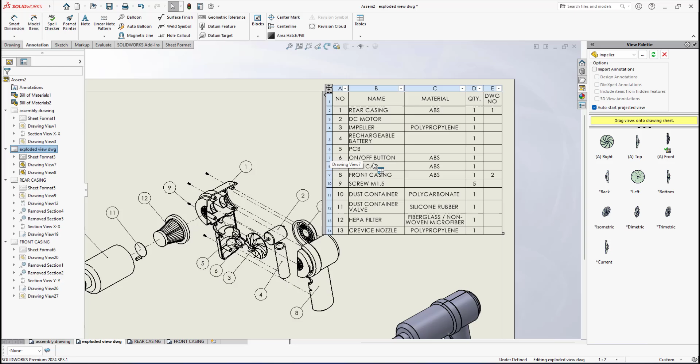This video I believe will be part 15 of my SolidWorks mini vacuum cleaner project. In this video I will do another detail drawing of the other parts, which is the impeller. So I will try to put the impeller and the on off button and rear cap. If possible, I will put it under one drawing. Sometimes you can do one drawing sheet of your detail drawing. You can share multiple components.

Right, so here there is the front casing, so I will make a copy of it and then I will paste it, and simply I will go after selected sheets and I click OK. Simply click yes. Then now I have here at the bottom the duplicated version. So this one I will rename it as Impeller. I cannot name it too long because we have kind of limited number of characters here.

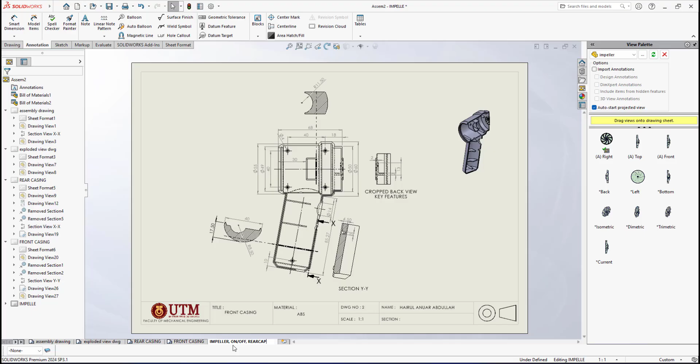On off button and rear cap, right? Rear cap. So these three parts would be in this new drawing. Okay, hold on. So this drawing, then I will delete this view and this one as well.

Alright, here the title block I edit it, and this one will be this one. The name is Impeller, on off button and rear cap. Material I will not put it, since later I will show you how I will delete this. Drawing number, this is supposed to be drawing number 3, and the scale later I will decide whether the scale 1:1 is good. Then now I'm back in drawing mode.

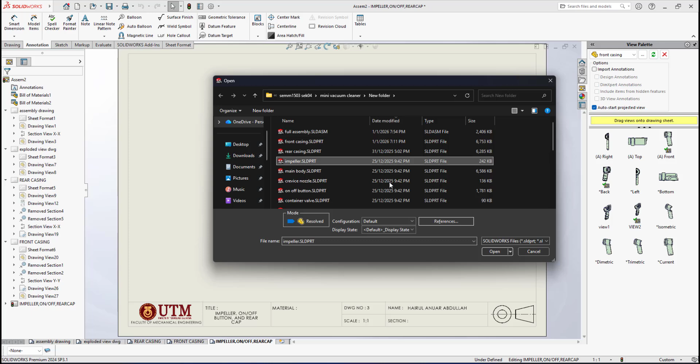Now I will open the impeller part file. If you look in this view palette, this is not the impeller, this is a front casing. To open the impeller here, I can click browse for the impeller part file. So this is my folder where I've done all the part modeling. So I will go for impeller, I click open. Now it's already listed impeller. As you can see in the menu here, we have all the views that we can drag into this drawing of the impeller part modeling.

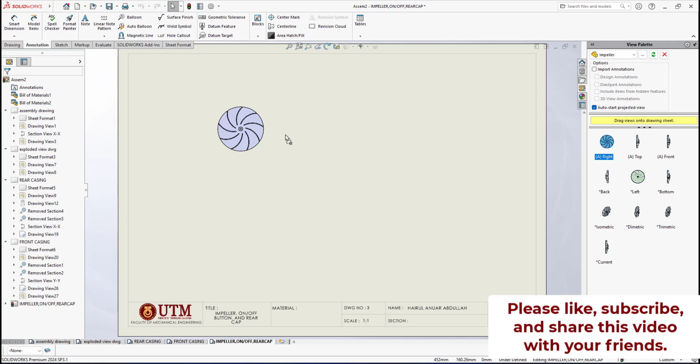The way I've done the part modeling for the impeller, the right view, on the right plane, is actually kind of like a front plane in the drawing. I just click at this right view here, and I click here at this location. If I drag it here, I can go for the left view, the plan view, and the isometric view. I only need the isometric view, and I don't want the left and plan view. I click OK. For the isometric view, I make sure tangent edge removed, and go for shaded mode. I just put it somewhere at this location.

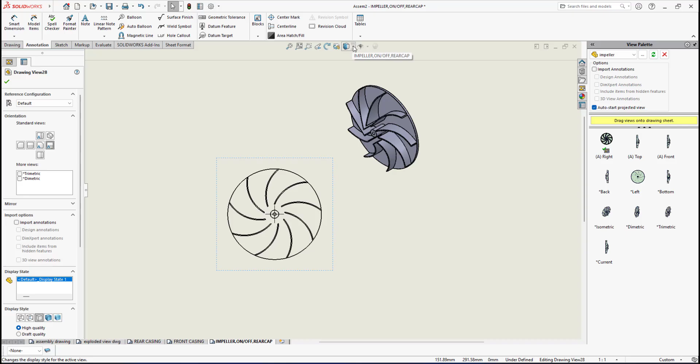Here for the impeller front view, tangent edge removed. Since this is not a section view, I need to show the hidden line. Actually, we don't have any hidden line because of the geometrical shape of this impeller, even at the back there is no hidden line. For the impeller, I need to make on the left a section view, so better to make it a section view rather than typical orthographic.

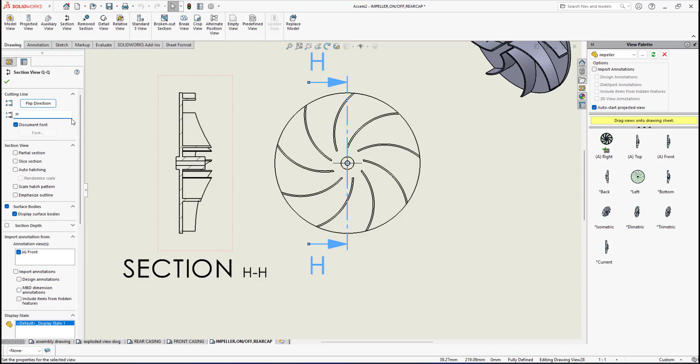Under the drawing here I have section view, then I can go for vertical. So I will select at this point, I click OK. I can bring my left section view here. About the direction of this cutting line, I can go to flip, so we are more on third angle projection. Let me click OK first. About the labeling here, I will go by the first letter. I can go for H, make sure capital letter. And now we have section H here.

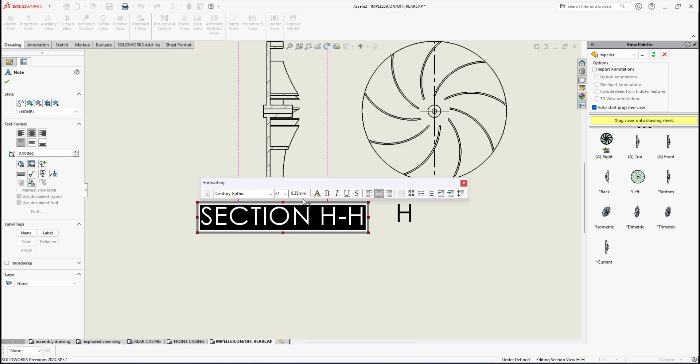About the text here, let me type first, section H, and if I double click at it, I need to make it 4 millimeter, not too big. 4 millimeter is about the standard size for the font for this title for section H. Another thing about the hatching line, I can make it, okay, density is 345.

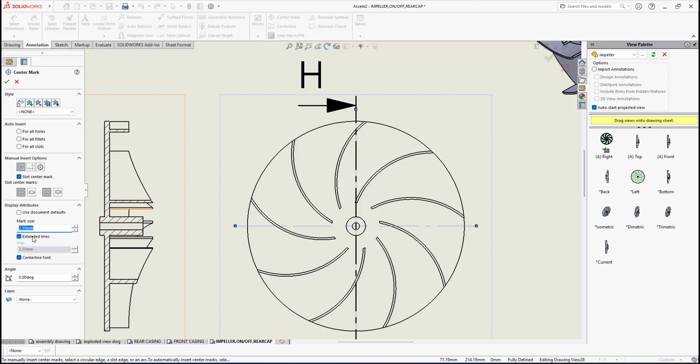Okay, let me save my file. Okay, now about another thing: any circular shape, you have to put a center mark. This center mark by default is not good, so I just delete it. Here under the annotation I have center mark, select the circle. By default it is using use document default. I uncheck it. I want to use not 2.5, I use 1. Then I click OK. It's kind of like the line type scale, it's more appropriate.

Okay, now I can do the dimensioning. The reason for me to do a section view is to facilitate the drawing; we want to avoid any hidden line, so better to make it a section view. Now for the dimension, diameter, better you go where you can see the true shape of the circle, better to be at the front view here. So I will go for this one.

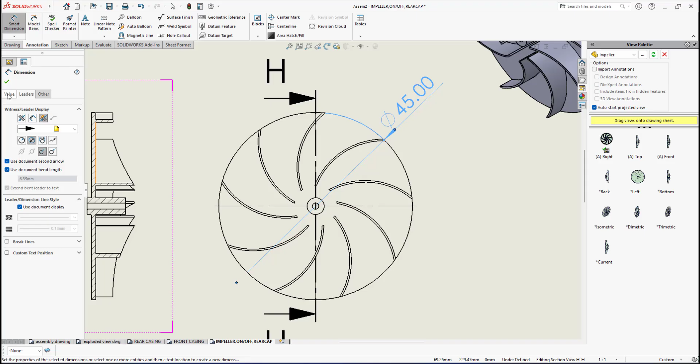Radius 22.5. Sometimes you don't want to go for radius, better to represent it as a diameter. Under the leader here you can go to the options and it goes for diameter. If you bring your text like that, the arrowhead is pointing like this, so I just simply bring it like this. And another thing is under the value here, no decimal point, so this will be the diameter.

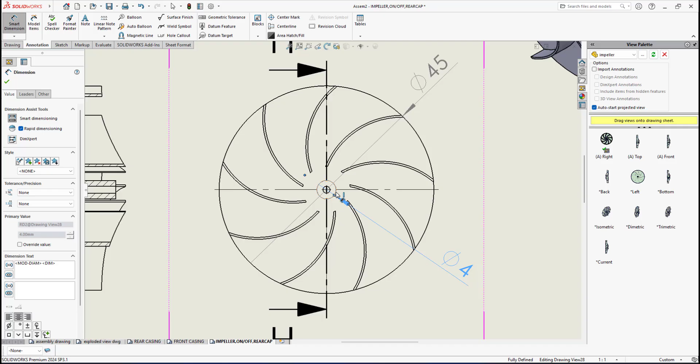Another important diameter: we have a pin here. So this is a pin. We have the center hub there. Diameter is 4, and also we have the inner hole there. Actually, this will be mounted onto the shaft of the DC motor. So I will select this circle, and I can put it at this location. So this diameter is 1.5.

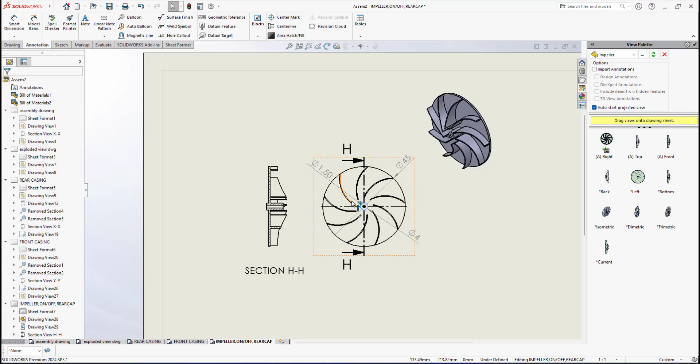Another important thing, as I mentioned before, for a plastic component like this, we don't have to do really detailed dimensions. For example, what will be the curve of this cutout when you're looking at this section view. We have a cutout here to make the blade. That is not necessary for this case, because the only dimensions we put for this plastic component are those for assembly and fitting and certain important dimensions. So I will go for the important dimensions only.

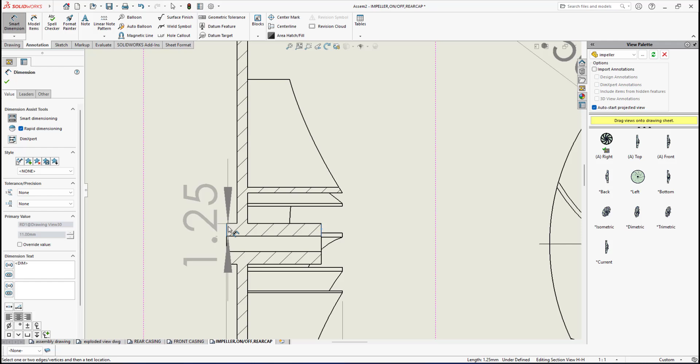I go for the total thickness of this blade. I can go from here to the end here, and it goes for 11. I put it here, so this will be the total thickness, 11. Another thing is this length from this point to this point is not significant. Then the tube: at the center we have the hub there, and I can give a dimension from here to here. I can give 9. I put it here, so this is 9.

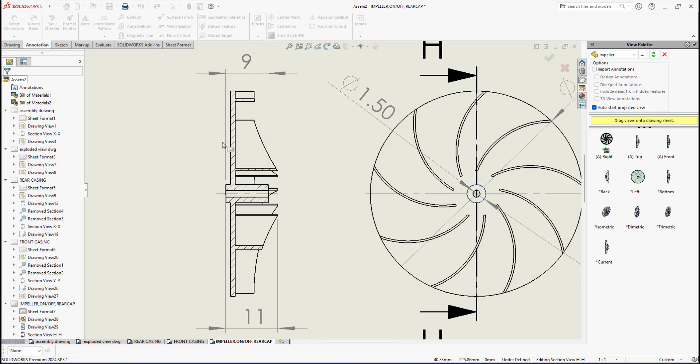Another thing, the diameter of the hole is already given. Before I forget, center line, we must have a center line for this one. And how about the thickness? I have to give the thickness from this line to this line. The thickness is 1.25. If I go for this upper side and this icon, everything will be shifted, so I need to drag it down.

You have to obey the standard of dimensioning, not too far away. The extension line cannot cross the dimension line, so the shortest distance will be at the first level, not too near, not too far, about 2 letter heights for the first level, and for the second level, not too far away or too near, at least about 1 letter height, like this. Let me drag this thing to this position.

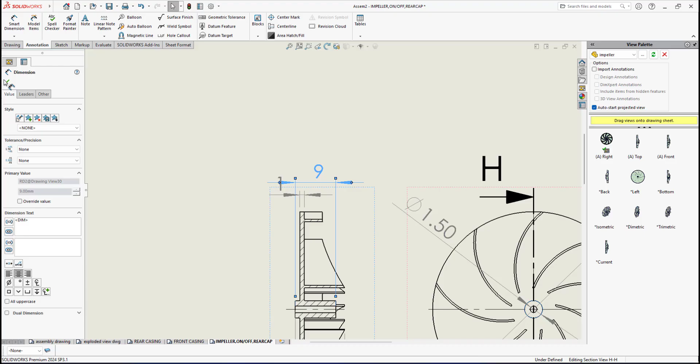Okay, save again. I have the dimension for this one, I already gave the length of the tube there, and the thickness is already given. I believe I already gave the main diameter. One thing before I forget, this is important. When people read the drawing, they need to know the number of blades. I don't have to give the radius of this one, it's not significant, because, as I mentioned before, the way they manufacture this impeller, this is not a metal part.

They are not doing this by milling, drilling, or lasing, or something else. This plastic component, they send it to CAM, which will translate to the CNC machine. The CNC machine will make the metal mold, and the metal mold will be put into the injection molding, and in that injection molding they will produce this impeller.

So if this is the way they manufacture this part, we don't have to give detailed dimensions, unless your part is a metal part where we need machining like drilling, lasing, and so on. Alright, so only the necessary dimensions, mainly for assembly and fitting.

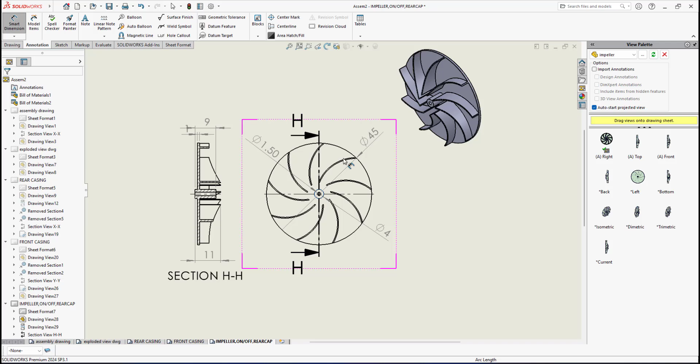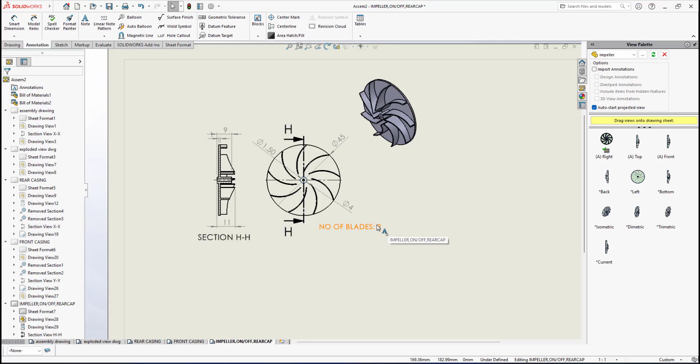Alright, okay, so now I will put another important note here. Since the number of blades is 9, we have notes, so I will put it somewhere at this location in capital letters. You put number of blades 9. Right, so I think that's all. This is enough information for what we call the detail drawing of this impeller.

Okay, one more thing before I forget. This is important. We have a local note here, right? Because we have to put multiple parts here, later I will put the on off button and also the rear cap. We have to put the local note as well. Here I will put the local note.

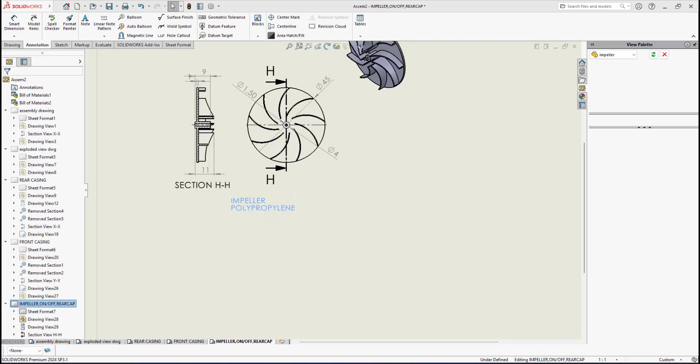So the first is the part name, so this is impeller. Then I go to the next line. The second one will be the material. As mentioned, the material of the impeller is polypropylene. Okay, the material is polypropylene. We have name, material, and the next line will be the quantity. Okay, the quantity is 1.

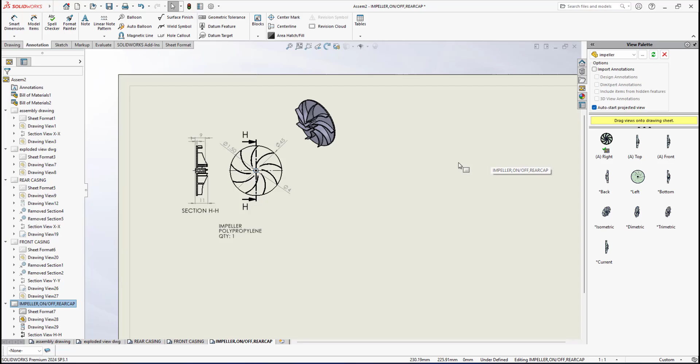The next line would be the scale, but I don't think I will put the scale, since I drag this view of this impeller in 1:1 scale. As you can see here, it's 1:1 scale, so I don't need to put the scale. Unlike the on off button, which I will put into the same drawing here. The on off button is really a tiny component compared with this A3 size. If I do the on off button at 1:1 scale, it will be so small compared with this A3.

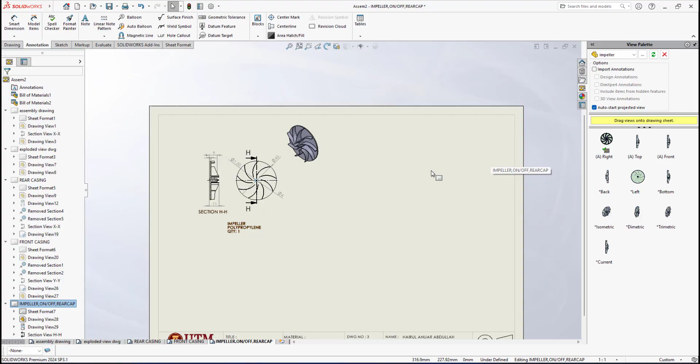It means that for that on off button, for the footnote about the scale, I will go maybe 2:1, 3:1, or 4:1, so it becomes bigger. So for this on off button, I will add the scale at the footnote. For this one, no need. It refers to the main scale of this title block, 1:1.

Right. Okay, another important thing, you have to put the part number. To put the part number, under annotation we have balloons. So I click like this. We have the circle. If I click this balloon here, in the settings on the left we have balloon text. I will not go for item number, I will go for text. Simply I type the number.

So what is the part number of this impeller? We refer to your BOM, it is part number 3. So for this one, in text I put 3, so we have a part number. Alright, okay, I think this is good enough for the impeller. We have the part number, the name, the material, and also the quantity. Alright, okay, I save my file.

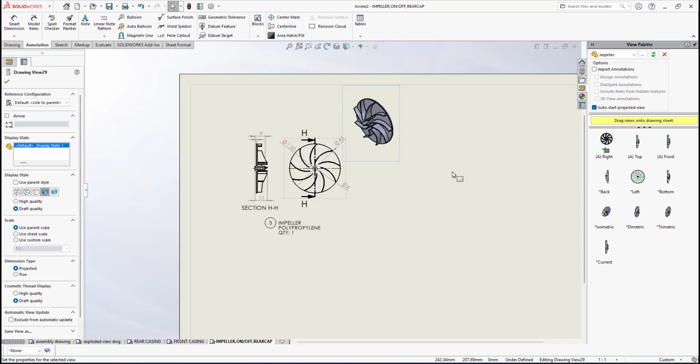Okay, later I can drag all these views to reposition them, to make sure that all the three parts that I want in this drawing are uniformly distributed in this drawing. Alright, the second one will be the on off button, and I will browse for the on off button. So I will select the on off button, then I click open.

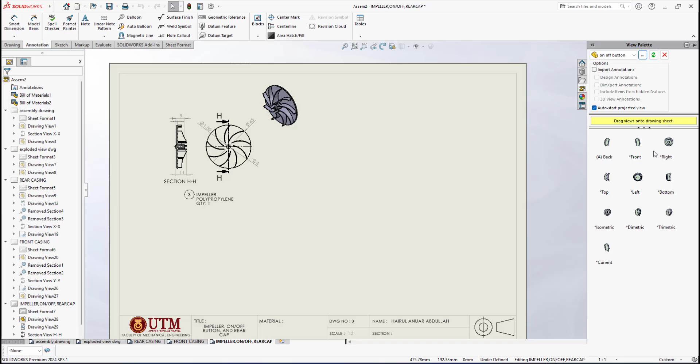Okay, now if you see under the view palette, we have all the views for the on off button, but one thing I need to mention, here if I drag the front view of my on off button, I put it here.

As you can see, the orientation of how I've done the part modeling of the on off button is not in the vertical orientation, it's at an angle, because from the beginning I did the part modeling of this on off button in assembly mode, and the axis of this on off button is perpendicular to the axis of the handle of my main body, the main casing.

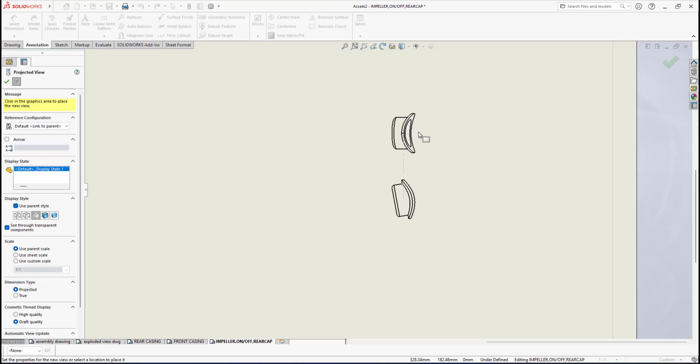So if I put it this way, the orientation is hard for me, it's not a standard view for this detailed drawing. So in order to solve this problem, let me show you. I don't want the on off button at this orientation, I need it to be in vertical orientation. So let me cancel this. I need to delete this first.

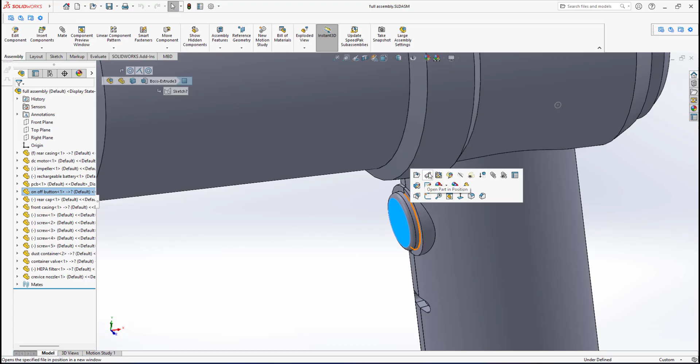Okay, what I need to do is open the assembly file, the full assembly that I have done. So this will be the full assembly. In this full assembly I will click on this on off button and open the part in position. Like I mentioned, if I go to the front view, the on off button's orientation is at this angle. This is the original on off button part modeling file.

I need to rotate it to the vertical orientation, but I don't want to disturb the original file, since whatever changes I make will affect the assembly I've done, and also the assembly drawing and so on. So I will make a clone version of this file. I will go to File, Save As, not Save as Copy and Continue. I will make a clone version, on off button 2.

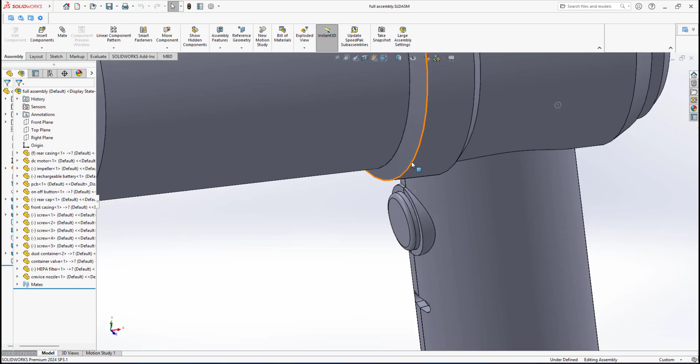So I have made a separate file named on off button 2. Whatever changes I make to on off button 2 will not affect the assembly and so on. I close this one and open on off button 2. This is the clone version. If I show you the front view again, I want to make this on off button straight vertical. I need to rotate it, right?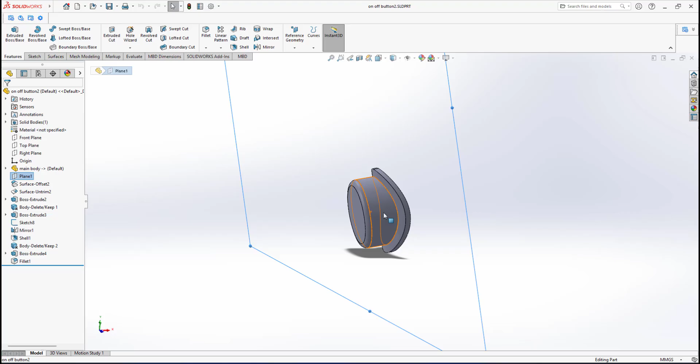But I need to know what the angle actually is. As you can see, there is a plane I've made for this. This is plane one at this orientation, so I need to know the angle between plane one and the right plane, the standard right plane. Under Evaluate, I have Measure. First I select plane one, the rotated position, and second the right plane.

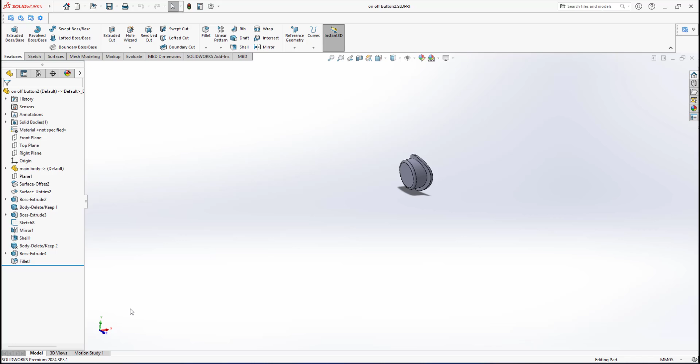It states that the angle is 10 degrees. Let me close this. So the rotation of this on off button is 10 degrees. If you look at the axis in the bottom left corner, it's 10 degrees off the Z axis. So I need to rotate this on off button 10 degrees counterclockwise. To do this, Insert, Features, Move/Copy.

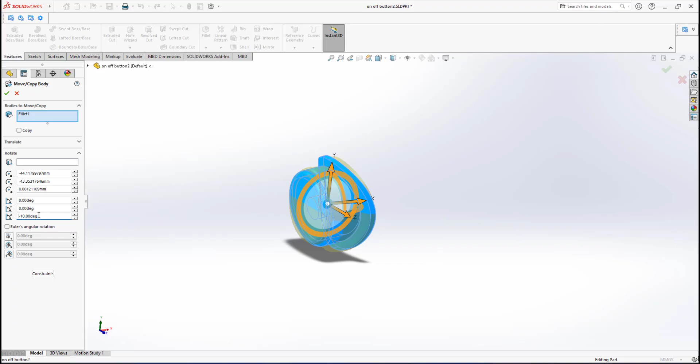I make sure that I uncheck Copy, and I select this on off button. The default is under Translate, but you have to go under Rotate. I want to rotate about the Z axis negative 10 degrees, so under the Z axis I put negative 10 degrees, then I click OK. Now, as you can see, if I go to the front view, my on off button 2 is in vertical position.

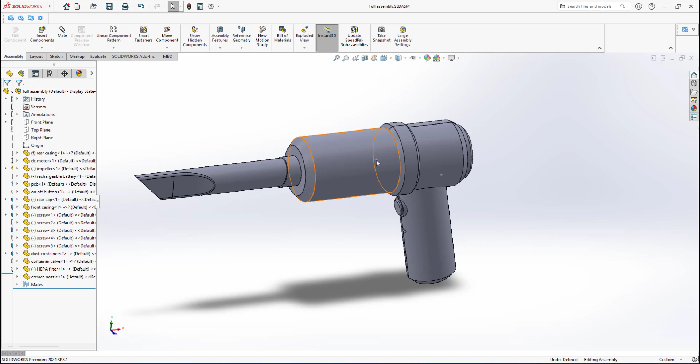I click OK. I need to show you it will not affect the full assembly file, since this is not on off button 2, this is the original on off button. Alright, so that's the way to do it. Okay, let me close this.

Alright, I have this on off button 2. If I go back to the drawing, now I need to insert under view palette. I will insert not on off button, I will go for on off button 2. Now this is a menu of my on off button 2.

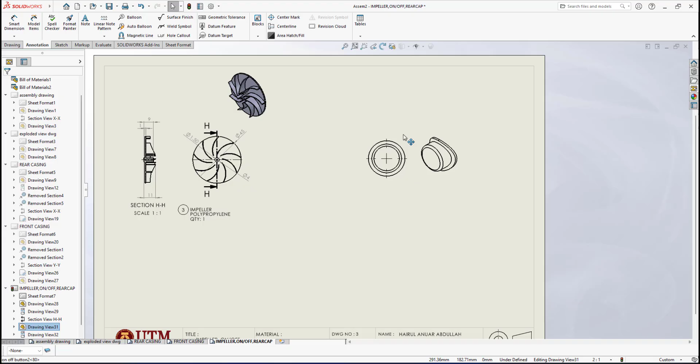Now I have the right orientation, so at this view palette I will go for the left view. I select the left view and I will drag it to this drawing, and I need this isometric view. Let me escape, and now I will drag this to this position, and this one at this position. Later I will adjust the position of all the parts after I put the other parts, which is the rear cap. But first, this is the on off button.

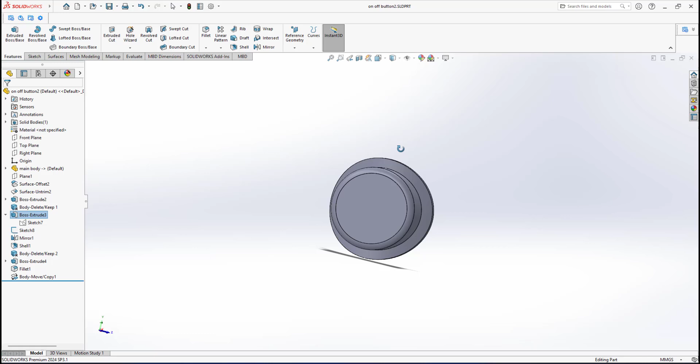The on off button, I already mentioned, is 2:1 because 1:1 is too small. Another thing: if you look at the way I did the part modeling of this on off button, if I want to do a dimension of the diameter of this shoulder in this drawing, using annotation dimension to give the major diameter, it cannot point to the circular edge here, but this one I can do. I can dimension the inner circular edge, but at the outer circular edge it cannot point to put the dimension for the diameter.

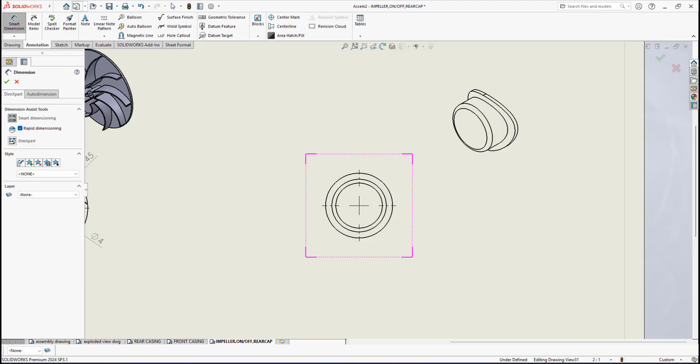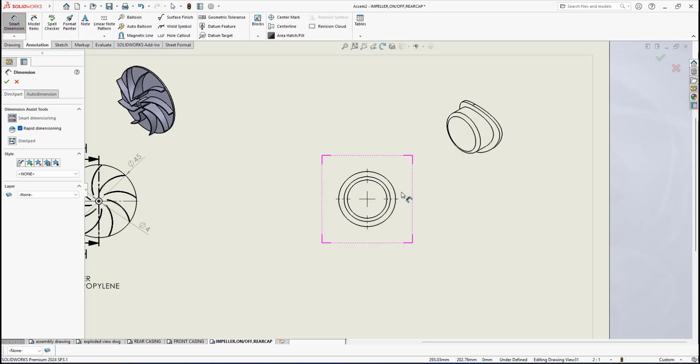This is because of the way I did the part modeling of the on off button. I did not do a direct boss extrude from a flat sketch plane; it starts from a plane but ends at the curvature surface of the main casing, the front casing and rear casing. So I have an outline here. It's a projected curve; it looks like a full circle, but it is a projection of the circle. So back in the drawing, you cannot detect that circular edge.

In order to do this, I open back the part modeling of on off button 2. Since this is a flat plane, I create a sketch. I draw a circle, make sure it snaps at the center point, and I need to select the relation. I select this curve and this endpoint and make it coincident. Now it's fully defined, so I can use this curve for dimensioning in the drawing. I save my file first.

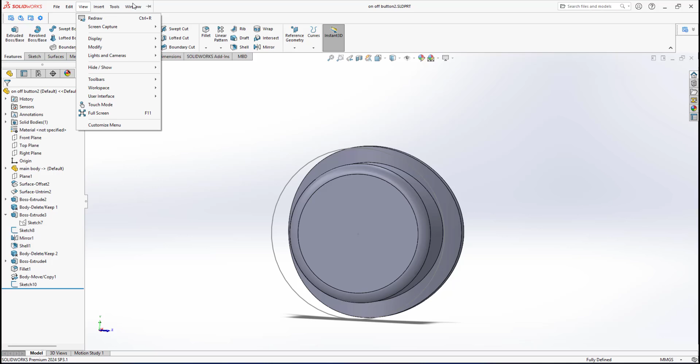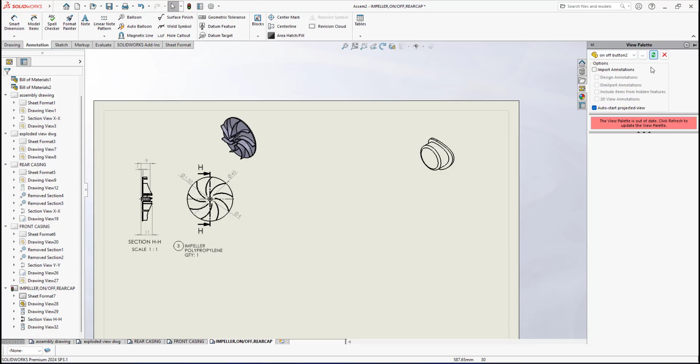If I go back to the drawing and go to annotation smart dimension, it still cannot point. This is because SolidWorks is not updating the view. I need to insert the view again under the view palette so SolidWorks will update, because I've added a circle there. So I go back to the left view again and drag it there. I cancel this, and if I do annotation smart dimension, then it can point.

Actually it's not showing again. This is because I have not turned on the sketch in the view. I have to turn on the sketch, because the circle I just created is a sketch. So now if I do smart dimension, it can point to the diameter. So this one I go for done. Only the important dimensions need to be shown for this on off button.

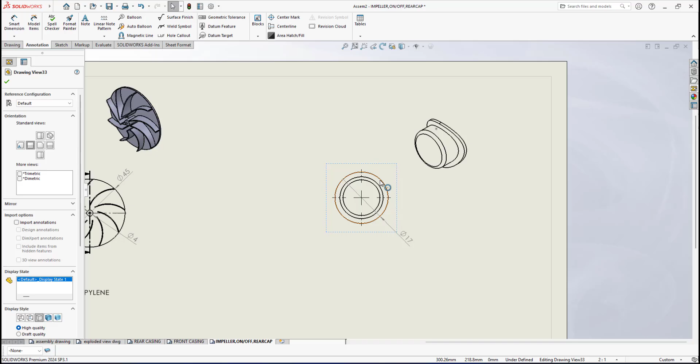Another thing about the center mark, I don't want to use this one. Now, as you can see, because I turned on the sketch in the view, I need to hide it so I don't have that point showing here. Another thing is this is supposed to be shaded like this, right?

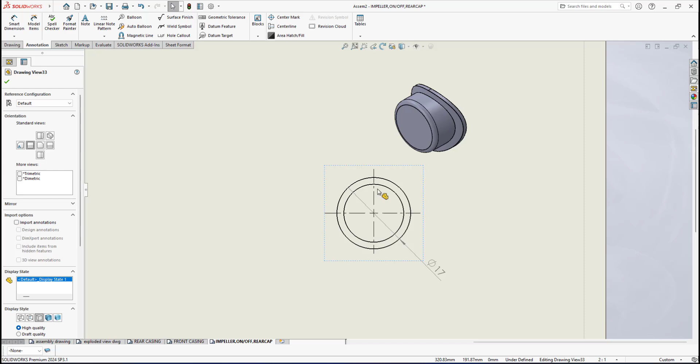Now, I can call this the front view for this on off button. The idea is I need to make a full sectioning for this on off button, right?

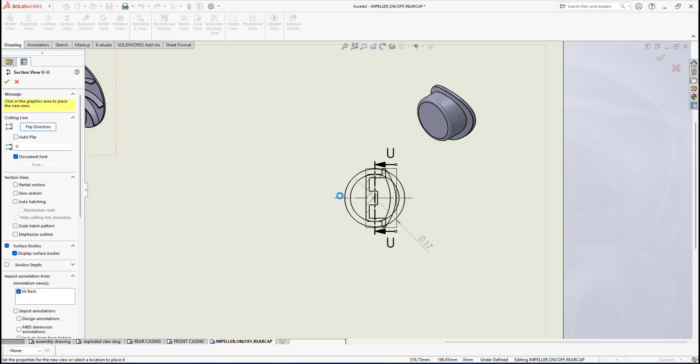So to do full sectioning, I will do drawing section, then I will go for vertical and I click OK, then I go to this side and make sure to flip direction, so this is full sectioning. Okay, this one is already section HH, this is supposed to be section UU, so I select this one.

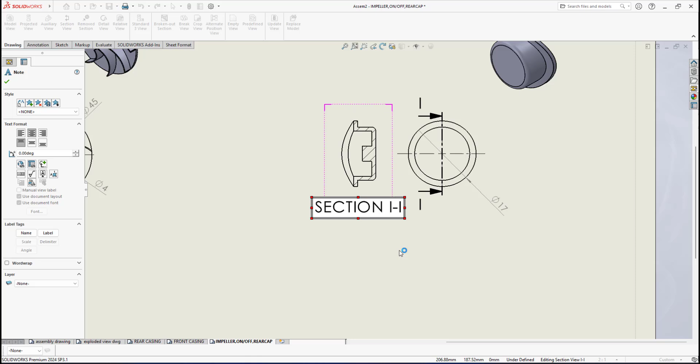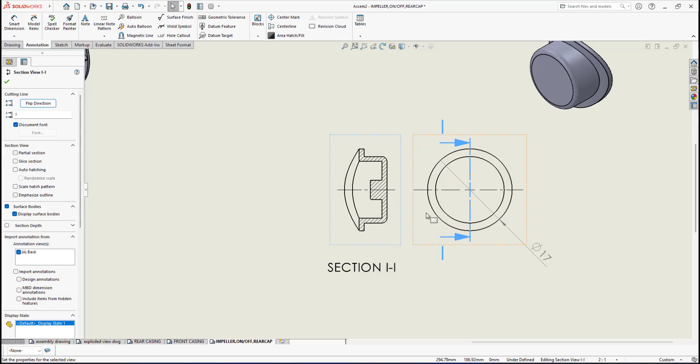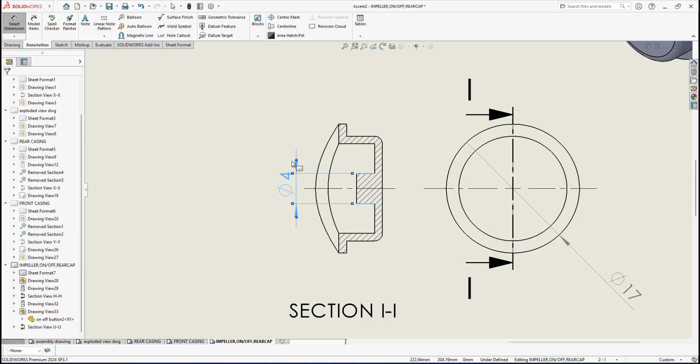and so we must have also the center line. Right, as I mentioned, only the important dimensions, and then, since we have a pin here, this pin will touch the tactile switch, the PCB tactile switch. Right, another important dimension, we don't need to show everything, like the thickness of the shell, that is not significant, because this dimension for plastic components is only meant for assembly and fitting.

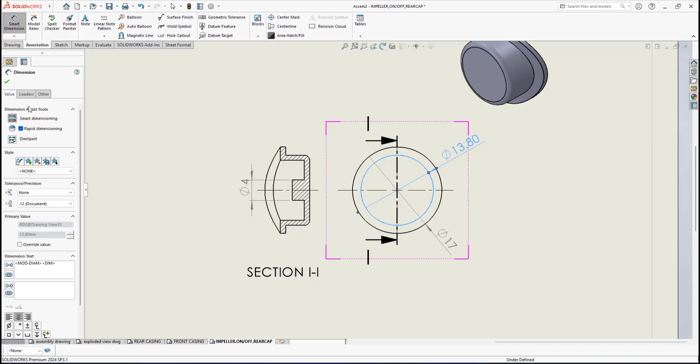Right, another important one, I already showed this major diameter is 17, because this is important. We know what is the shoulder diameter. The important diameter is this one, the diameter of this outline, because this will be fitted into the hole of the front area casing, so this one needs to be shown. This diameter I need to show it, diameter 13.8, right? And this one is important for fitting.

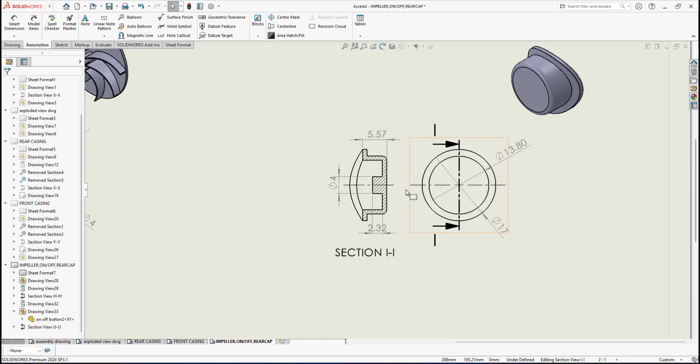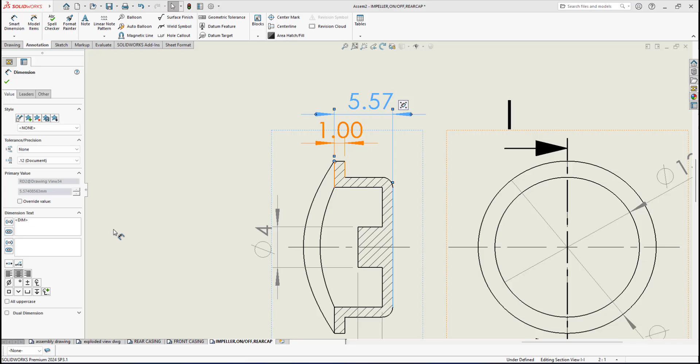Okay, another important dimension is the thickness, maybe I can go from this point to this line, and... alright, I think this is good enough already to show the dimension. Maybe I can give another dimension, the thickness from here to here. Right, so let me drag up until this position, and this one I need to shift to this position. This one has to be no decimal point. Right, let me save my file again.

Okay, one more thing is here, the footnote of this on off button. I will select this thing, and copy and paste it. Alright, the part number, if you look at the exploded view for the on off button, would be part number 6. So I click at this balloon, and under text I put 6, and the name is on off button. And the material for on off button is ABS.

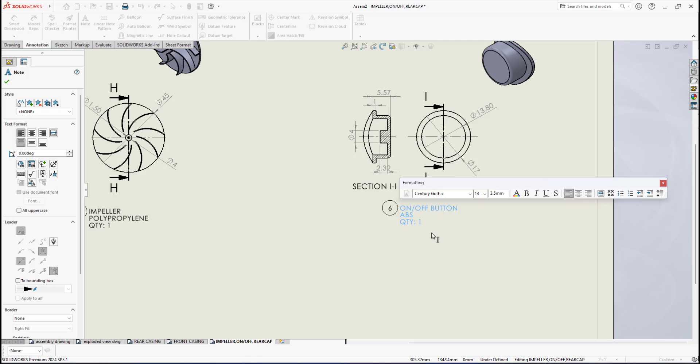Alright, we have the part number, the part name, the material, and the quantity. Since I zoomed this on off button 2:1, I need to add at the bottom note here scale 2:1, so it shows that this on off button is not full scale. This is 2 times bigger. For the impeller, I don't show the scale because it will refer to the main title block. The scale is 1:1.

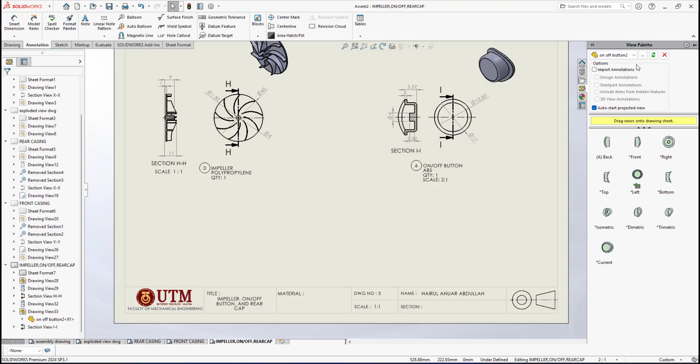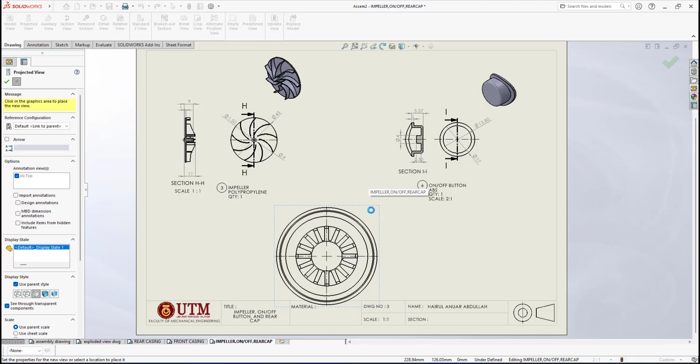Alright, the next component is the rear cap. So I go to view palette again, then I will browse for the rear cap. For the rear cap I will go for the right view, so I will drag it here, and another one is the ISO view. Okay, I press escape. Alright, for this view, at the setting on the left here, I will go for full scale. This one, tangent is removed, and this one as well. About the center marks, I go for 1.

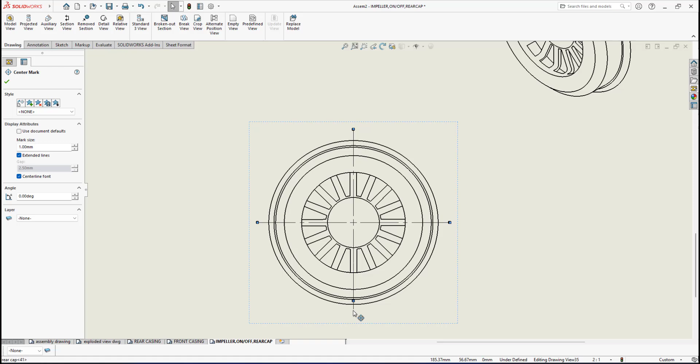Okay, since I need to make a full section view, this is not section view, so I need to show the hidden line. Alright, this one, no hidden line. Okay, let me drag it for positioning.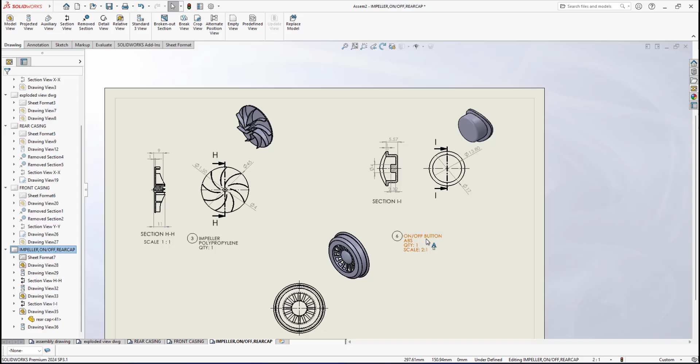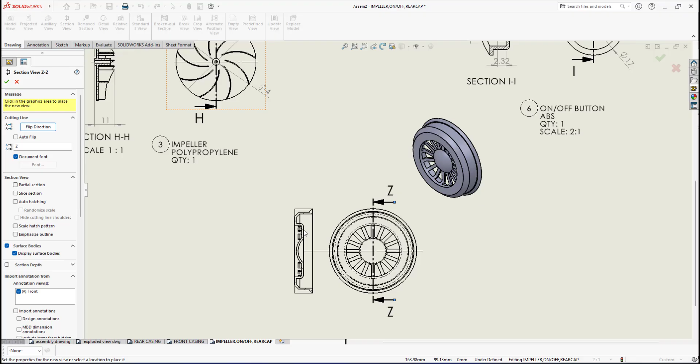Okay, for this rear cap, I need to do a full section. So I will put this direction, then I go for flip. Okay, this one, the section line, the hatching, hold on. Okay, about the section view. Since I already have HH and I, this one will be J.

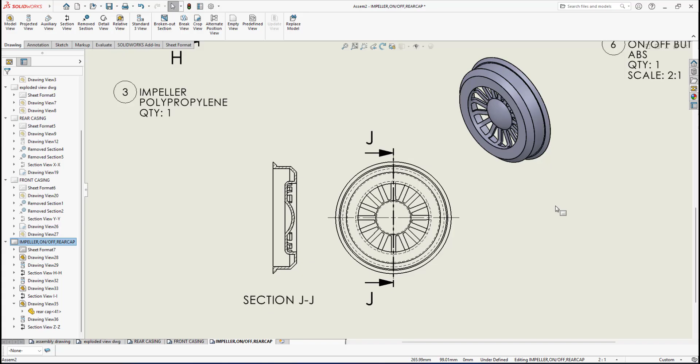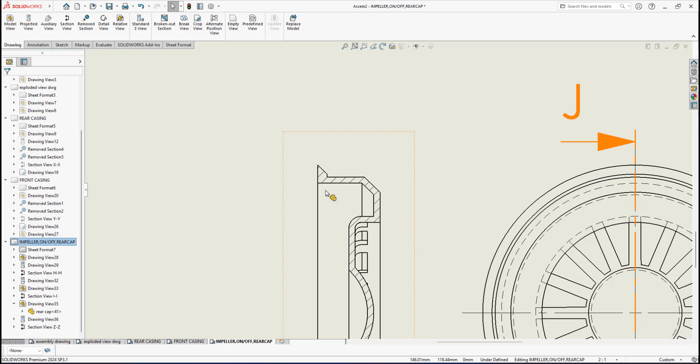Okay, about dimensioning the rear cap, as I mentioned before, we don't have to put really detailed dimensions, only for assembly and fitting. Since the rear cap, at this point at the back, is supposed to be mounted onto the slot, the cutting slot of the rear casing and also the front casing, I need to give a dimension of that diameter. So it means this outline. So I need to put this diameter, 49.

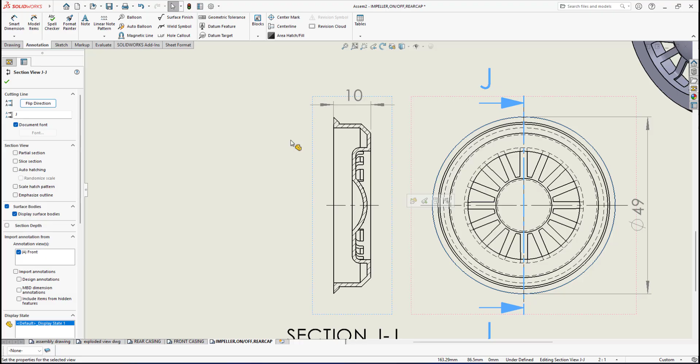And another important dimension: I can give the total thickness. And it's about the center line. Okay, another important dimension that I should put is, I have the thickness and also the main diameter here. Actually this is enough, but I should add more. Since we have a repeated circular pattern here, maybe I can give a dimension of the angular dimension,

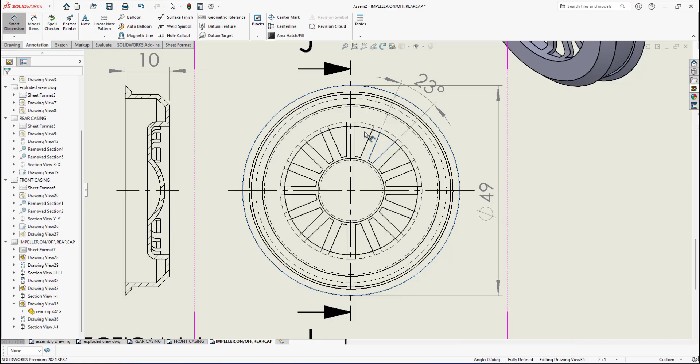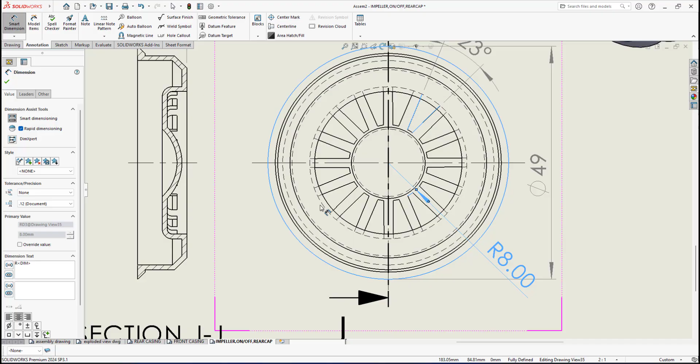23. Actually, the way I did it, this is not parallel, so maybe I can go for the diameter here, and also the hidden line diameter here. We have a hidden line, but I cannot put it here because it's not showing the profile of the circle. Because this is the profile of the cutout, I should put the diameter here, 32.

Okay, I think this is good enough to show some description about the size of this rear cap. Actually this is not the detailed dimension, but I think it's good enough for this rear cap. And the most important thing is how we mount this rear cap onto the rear casing and also the front casing. We need the diameter at this point. From this point, the diameter is already given as 49.

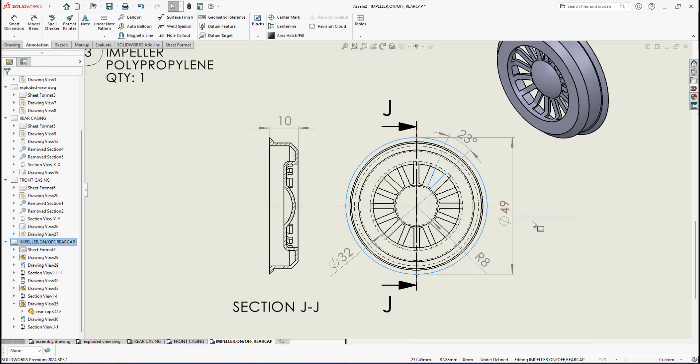Alright, so I will copy and paste this one. Alright, the part number. Okay, the rear cap will be part number 7. And the material for the rear cap is ABS as well. Quantity is 1, and the scale that I've done for this rear cap is not scale 2:1, so I need to delete this.

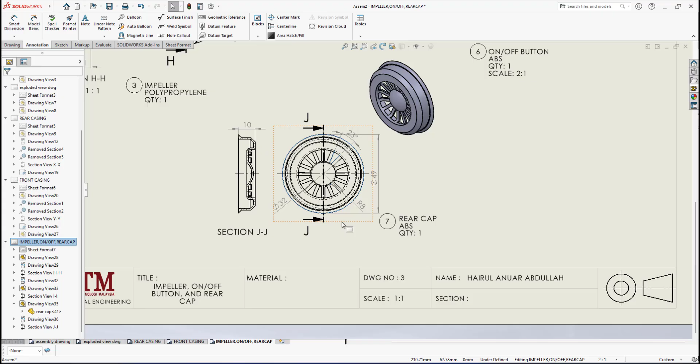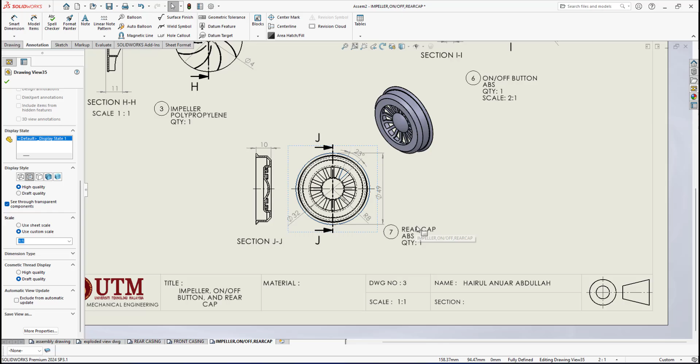The scale of this rear cap compared with this A3 size: the 2:1 is meant for this one, the on-off button. If you want to check the scale of your viewport, you can check here at the document properties. For the rear cap it is 1:1, so it's okay; this rear cap will be referred to this drawing at scale 1:1. Same goes for the impeller.

Okay, I think I have completed this detailed drawing of the impeller, the on-off button, and also the rear cap. I have put drawing number 3. I already put it in the BOM of the exploded view, drawing number 3, and the same goes for the BOM of those three components, the impeller, the on-off button, and the rear cap, drawing number 3.

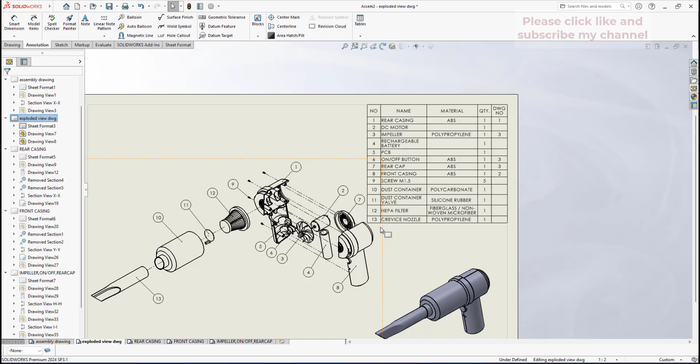And in the next video I will see you for the other 3 parts. The other 3 parts will be the dust container, the dust container valve, and also the crevice nozzle.

Alright, I need to mention that I found out the HEPA filter is a standard part. It means the company who designs and manufactures this mini vacuum cleaner will not manufacture this HEPA filter; they simply order it from vendors. So the HEPA filter will be a standard part, and we will not show the drawing of this HEPA filter because the drawing is already done by the vendors.